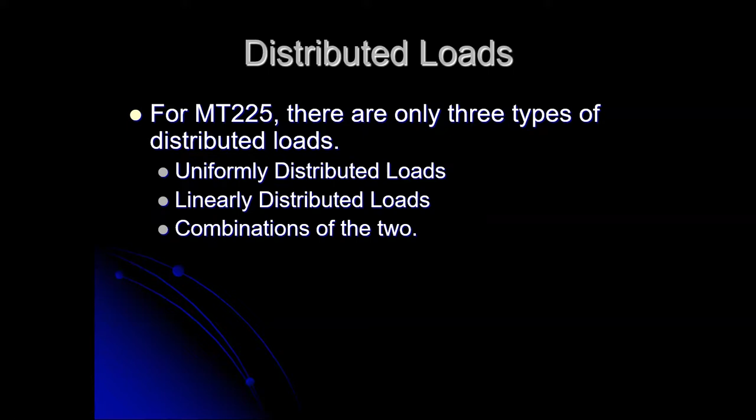Linearly distributed loads start off at almost nothing and then climb up to some peak value after some amount of distance. So it's a straight line behavior with weight or with force, and that's the way we draw them out, so that the representations of those forces call into mind things that are uniformly distributed or linearly distributed.

And we can combine the two. We can add them together. We can put them on top of each other, things like that. And we'll see a couple examples of that.

So to handle a distributed load, we have to find the load's equivalent concentrated force. And that involves two pieces of information. Just like in weight and balance, you're looking at the force of gravity distributed all over the aircraft. You not only need to know the total weight, that's how much force there is, but you need to know where that force is, the center of gravity location.

So essentially, in each of these distributed forces, we're going to find a center of that force. That's the location where the force is applied. And then we have to total up how much force there is. So there's always going to be two factors involved in finding out what the equivalent concentrated force is: a total amount of force and then a location where that force is.

If we replace the distributed force with the equivalent point force, nothing changes about the loading of the structure. Specifically, the reaction forces at the supports will not change. There is some material difference inside the structure, but as far as the supports are concerned, it can't tell the difference between a distributed load and a concentrated load. So we turn everything into concentrated loads because it makes the analysis easier.

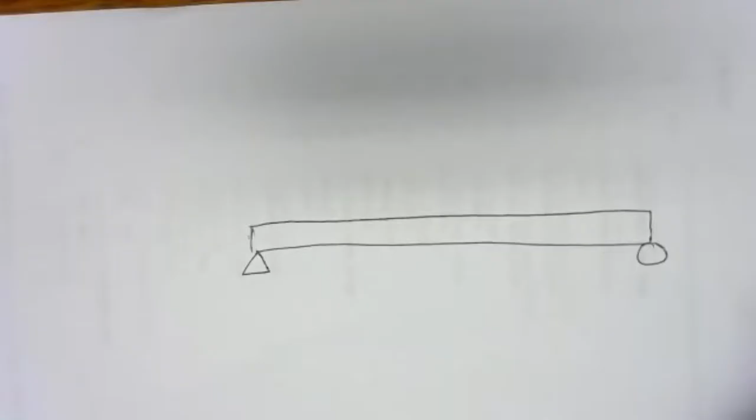And let's put a couple of distributed forces on here. We'll have one that looks something like that—let's say 2 kips per foot, and we'll let that extend over a distance of 4 feet. And we'll let that distributed load start, let's say, 2 feet in from the end of the beam.

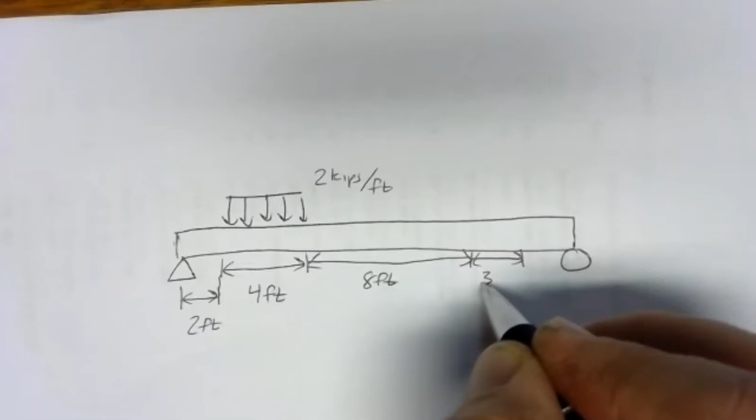And then let's see, maybe we'll put 8 feet in there, and then maybe another 3 feet. And we'll have a little bit heavier distributed load there of, let's say, 10 kips per foot, and we'll put that also 3 feet from the end of the beam. So that's all fully dimensioned out now—we know what the sizes are.

And I guess I'll draw another arrow in there. There we go. So there we have two distributed forces.

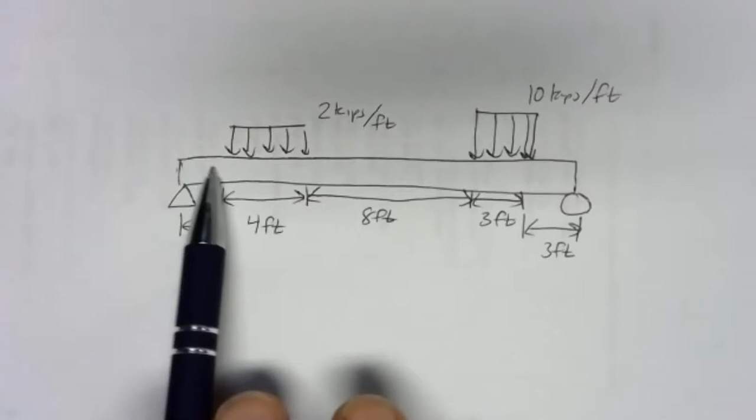Now, to analyze this problem, we actually have enough information to figure out the support forces, but we're not going to work that out here. Our only task right now is to turn this into an equivalent point force problem, because these supports can't tell what the load looks like. It doesn't know if it's dealing with a distributed force or a point force. The beam knows—the material that makes up the beam is going to be loaded differently if it's got a distributed force versus a point force. But as far as how those loads are handled by the supports, it's not going to make any difference.

So we have to turn these two into their equivalent point forces, and we have to figure out where those point forces are located. So we can start by drawing the beam over again.

First thing I like to do is figure out what is the magnitude of the force I'm dealing with, and just work with one distributed force at a time. So my first one here, I've got 2 kips per foot spread out over 4 feet. Essentially, I've got a rectangle here that is 2 kips per foot high, but 4 feet wide. If I wanted to find the area inside here, it's just the area of a rectangle—you take the height and the width and multiply them together. So this equivalent point force is going to be 8 kips.

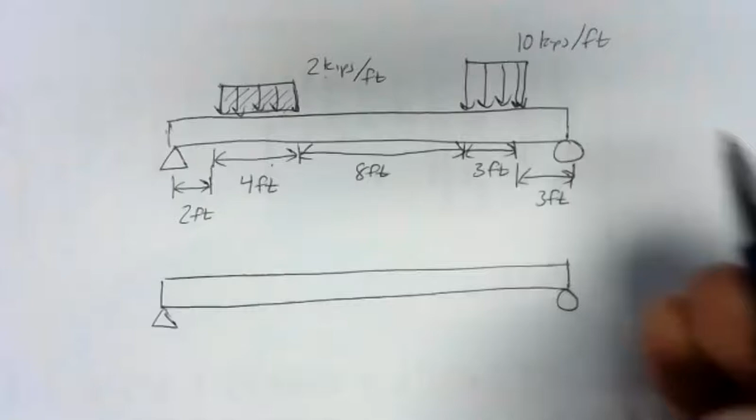Watch the units, be careful. I'll write it out once explicitly, but I'll expect you to get the units right in the future. If I take 2 kips per foot and multiply that by 4 feet, the feet cancel out, and I'm left with 2 times 4, 8 kips. So I've got an equivalent 8 kip force here.

And that 8 kip force is going to be dead in the middle of that 4-foot range. So to figure out where to put it on the end of my beam, if I'm referencing my pinned support here, I've got to go 2 feet in, and then half of 4 feet, which would be another 2 feet. So that equivalent point force of 8 kips is going to be 4 feet in from the end of the beam.

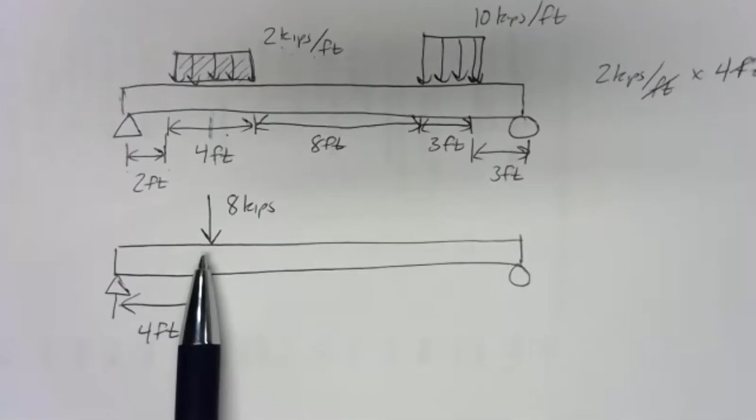So there we've successfully translated between a uniformly distributed force and its point equivalent force. We figured out the magnitude by multiplying the intensity, 2 kips per foot, by the length it's distributed over. Each foot feels 2 kips, we've got 4 feet to deal with, so we've got a total of 8 kips. The location is dead in the middle of the distribution—you look at where it starts and where it ends, dead in the middle, the balance point. Essentially, think weight and balance: where would you put your finger to balance this shape? The only place where it's going to have no moment, where it's in balance, is dead in the middle, where there's the same amount of force trying to rotate it clockwise as counterclockwise.

Let's try it with the 10 kip per foot force. Here we've got 10 kips per foot, spread out over 3 feet. So each foot feels 10 kips, and we've got 3 feet to deal with—that's going to be 30 kips.

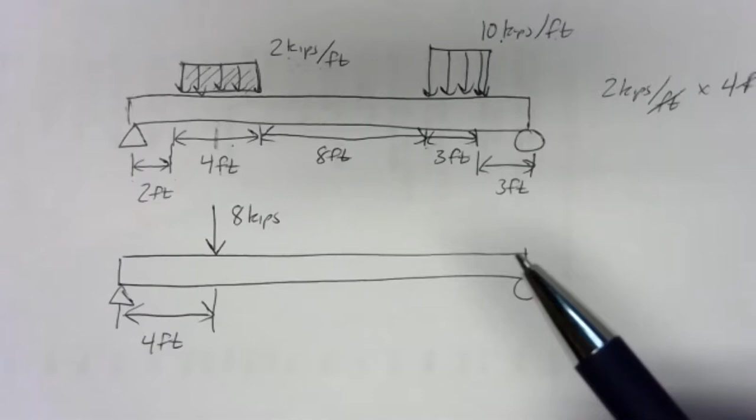So that's 30 kips of force. Where it's going to be located, it's going to be dead in the middle of that distribution, so right in the middle of this 3-foot range. So my equivalent 30 kip force is going to be right around there. I have to leave a little bit of schematic variation—remember, it's not quite to scale, but the labels should all work out. So we've got 30 kips of force there.

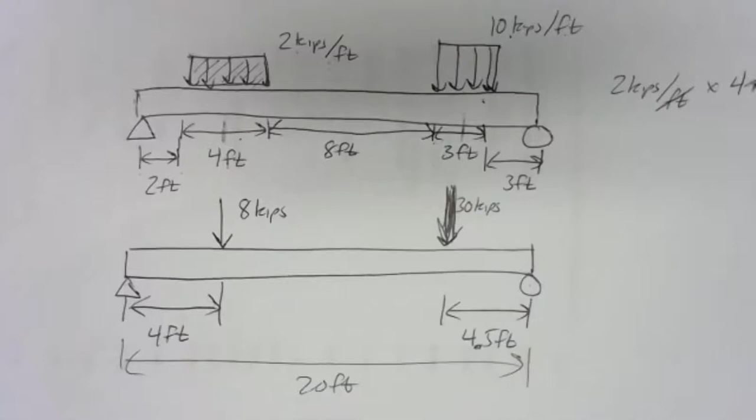If I go from the other end of the beam, I've got 3 feet plus 1.5 feet, so this would be 4.5 feet in from the other end of the beam. Then you could figure out what the distances would have to be in the middle, or knowing that the whole beam is 20 feet long, you could figure out the geometry you'd need from there. Remember, when you find moments, all the forces have to be measured from one point, so you'd have to do a little math here to figure out your distances. But as long as you've got them located, this would be the equivalent problem.

So this is just like the problems we solved last week, and just like what's on your current homework assignment. That's how we translate a uniformly distributed force into equivalent point forces. We take the new situation, turn it into the old situation, and then solve the old situation.

Anything not quite making sense there?

All right, well, let's see a linearly distributed force.

So that's our uniformly distributed force. The linearly distributed load looks something like this, where it starts out—depending on which way you look at it—you can either think of it as starting out heavy and then tapering off to nothing, or starting off really light and tapering up to some maximum.

W in this case, the intensity, refers to the maximum intensity—the height of this triangle. If it helps you to think of it this way, you can call it a triangularly distributed force. If you want to reference the shapes, triangle and rectangle, as long as it helps you get the equivalent loads, go for it.

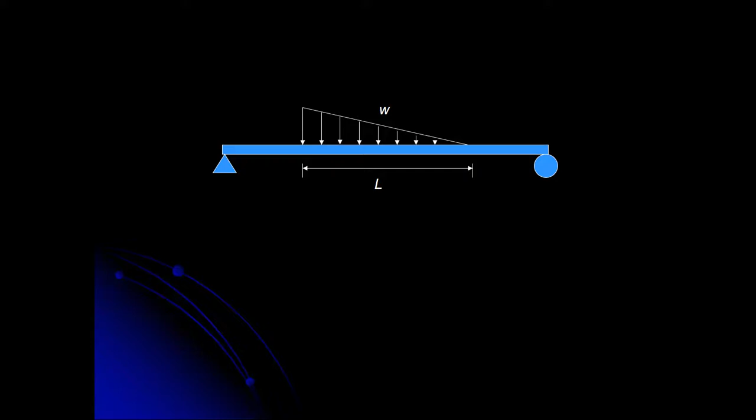The base in this case is the length. The height is the maximum intensity, W. So the magnitude of our distributed force, the equivalent point force size, is going to be 1/2 W times L. In fact, if you page back and forth between the two slides, you can see that it's really just half of the uniformly distributed load.

When we cut that in half, we get the linearly distributed load. The tricky point is figuring out where to put it. The middle is not going to work here. If this was some shape cut out of metal and you tried to balance it on your finger by putting your finger right in the middle, it's going to rotate.

If you think about it that way, your instinct would probably tell you, well, I can't support it at the middle and have it balance. I'm going to have to move my finger toward the heavier end, toward the end that's pushing down harder. The balance point of this distribution of load is going to be closer to the big end of the triangle. Exactly where? That's a little bit harder to calculate.

It requires a little bit of more advanced math to figure out exactly where it goes. So you'll have to trust me when I say that it is 1/3 of the length in from the large end of the triangle. There are a few geometric arguments you can make on that, but for the most part, for a linearly distributed load, the balance point—the point where that equivalent force needs to be applied—is 1/3 the length in from the big end of the triangle.

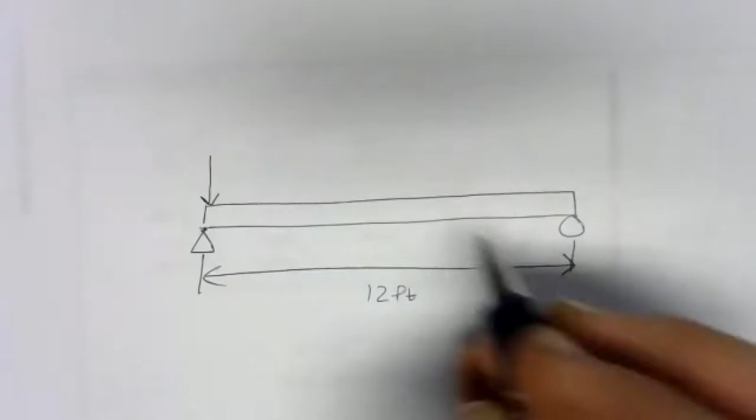And we'll put a linearly distributed force here from right at the beginning of the beam down to, let's do 3 feet. So that's spread out over 3 feet. And let's make this a 200 pounds per foot maximum distributed load. So that's how high this peak is. It tapers off to 0 over 3 feet.

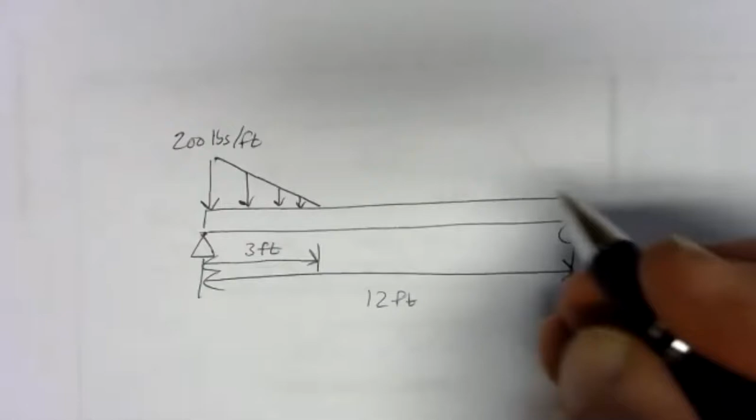And then we'll put another one in here. That spreads out over 6 feet. And we'll have that one start out at 400 pounds per foot and taper down to 0 over 6 feet, or start at 0 and taper up to 400 pounds over 6 feet.

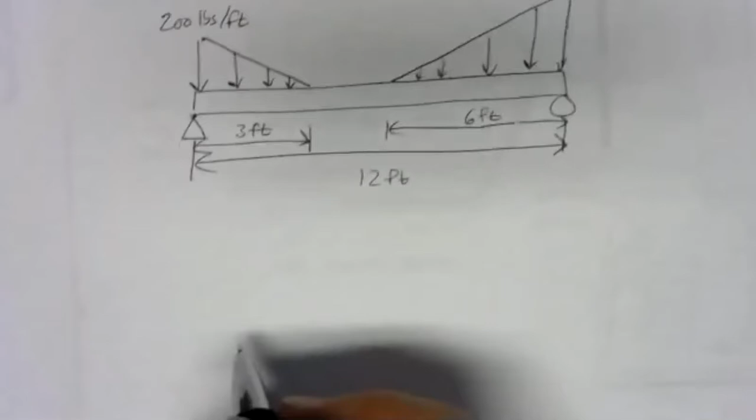So there's our setup. In order to analyze the problem, we have to figure out what are the equivalent point forces. So let's redraw the beam. Deal with the 200 pound per foot force first. So we have 200 pounds per foot spread out over 3 feet. We need the area underneath there. So it's a triangle with a height of 200 and a base of 3.

So we take 1/2 base times height. 3 times 200 would be 600. So 1/2 of that is 300. So this is 300 pounds. Another way to look at it is to say, well, if it was a uniformly distributed force, we'd have a rectangle here that would be 600 pounds. We can cut that in half. So it's 300 pounds. So we've got a total of 300 pounds from that first one.

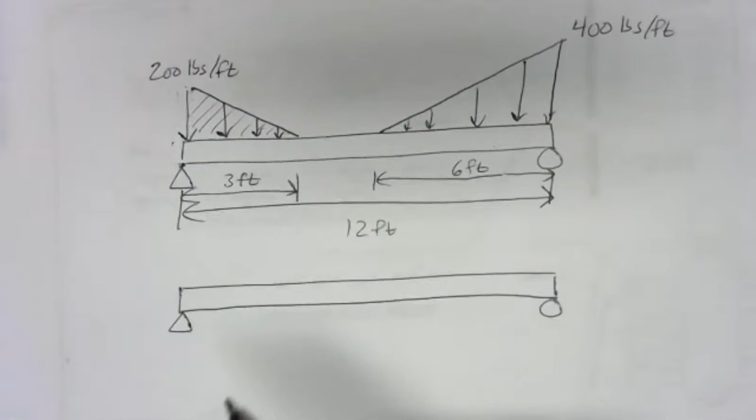Then the question is where to put it. If we tried to put it in the middle, it wouldn't work, because we'd have more moment on one side than the other. If we think about trying to balance here, there'd be more counterclockwise than there would be clockwise. We have to put it right at the balance point, at the CG, essentially.

And that's 1/3 of the length in from the big end. So we've got 3 feet. 1/3 of 3 feet is 1 foot. So we've got 300 pounds, 1 foot in from the end of the beam. So that would be our equivalent point force: 300 pounds.

One foot in from the big end. Think about where that physical balance point would be. If this was some triangular shape cut out and you tried to support it, it would have to be closer to the big end. So don't put it one third of the way in from the small end, it's one third from the big end. Let's try the other side here.

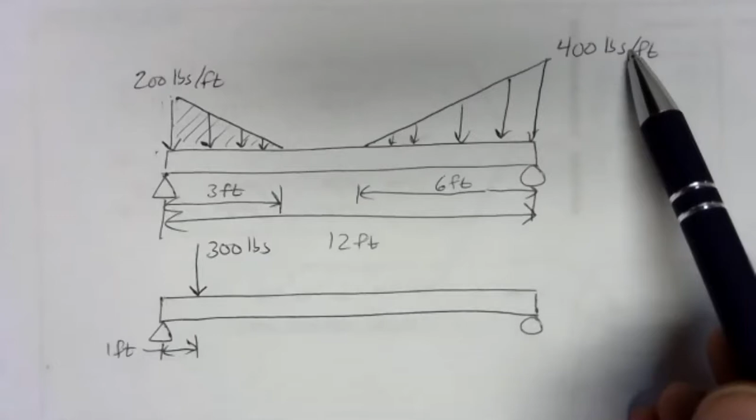Here we've got 400 pounds per foot spread out over 6 feet, but tapering down to 0. So again, it's a triangle. We need the area here, that's 1/2 the base times the height. So we have 6 times 400, that's 2,400. 1/2 of that would be 1,200. So we've got 1,200 pounds here.

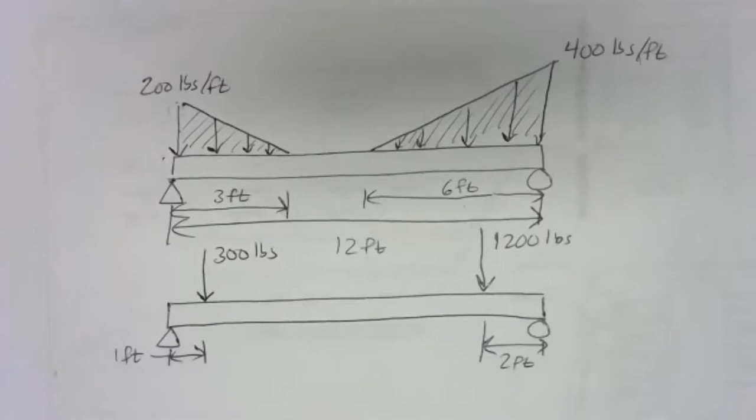1,200 pounds of force, 1/3 of the base in from the big end. Well, 1/3 of 6 feet is 2 feet. So that's going to be 2 feet in, 1,200 pounds. So our equivalent point force is going to be something like that, 1,200 pounds, two feet in from the big end. And then you could go and figure out the rest of the numbers. You could say there must be 9 feet there, and that should be enough to find the reactions at the supports.

So that's how we translate a uniformly distributed and a linearly distributed force into point equivalents. Once we have those point equivalents, it's the same old problem. Any questions there? All right.

Let's see what it looks like in the generic case. The generic case would need a lot more mathematical sophistication to handle. Some of you may have that, if you've taken a class in calculus, for example, you may have the tools to do this. In a generic distributed load, we could have essentially any shape, with some value there, maybe some value over here, and then does all sorts of strange things.

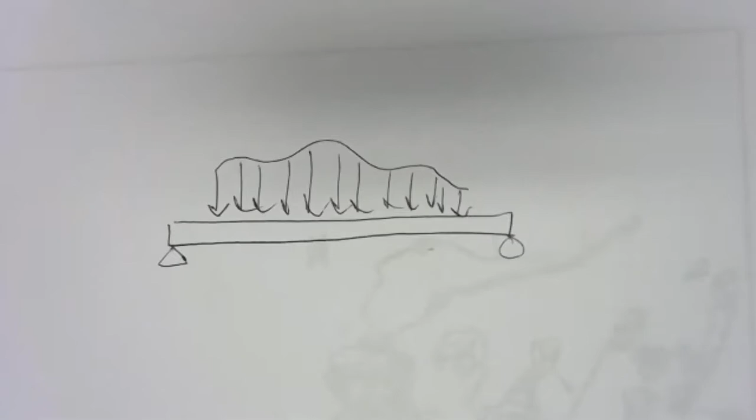So the intensity changes as a function of position. For those familiar with calculus, this is a classic setup for the problem we call integration. Finding the area underneath a curve is the classic application of integration. Fortunately, calculus is not a prerequisite for this class, so if you have no idea what I'm talking about, don't worry about it, we'll skip that. But if you have had calculus, this is something you could potentially do with it.

For our purposes, we don't have the mathematical tools to do that, so we'd have to have some way to find the area underneath the curve. That would just give us the magnitude of the force. Finding the position where the force belongs is a different calculation, what we call integrating the first moment of the distribution. That's where the term moment comes from, and why moment ends up tied up in weight and balance and things like that. There's a lot of mathematical stuff there that's pretty classic, but beyond the scope of our class.

For our purposes, we're going to deal with simple distributions, either the two we just described or some combination of them. The process is not unlike finding the center of gravity. Centers become an important idea, and that balance point has an official name, we call it the centroid of the shape. Kind of a funny name, but it's the generic name for center of gravity. It's just center of whatever, center of area, center of force, center of lift. They all fall under the category of centroid.

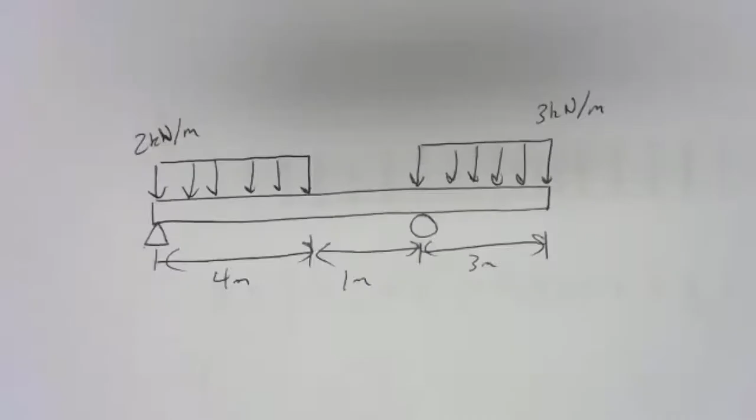All right, so there we've got the basic picture here. Not quite to scale, but we can work with it. So this has enough information to allow us to solve for the reactions. We know the geometry, we know the forces, so we've got everything we need. There are no missing pieces here.

The first thing we have to do is turn these distributed forces into equivalent point forces. The first force over here, what we'll do is jump one step here to my free body diagram, because we are going to analyze this one. I'll work this one through as an example and a refresher from last week about how to solve non-concurrent force problems.

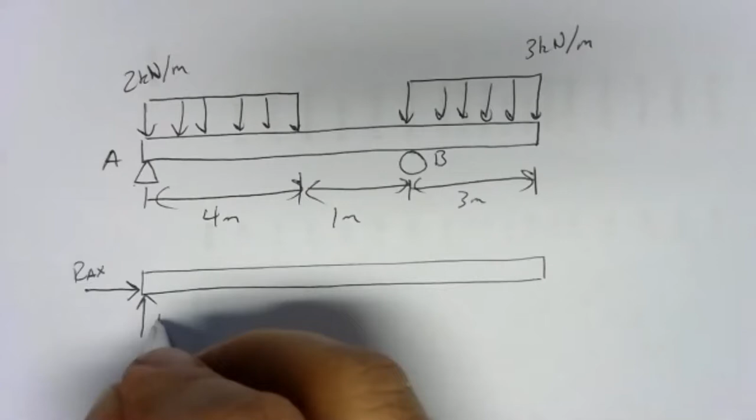So let's go ahead and put in our reactions at A and B as in our free body diagram. I really don't know what's going on at A here, so I'm going to assume RAX to the right and RAY up. And over here where B is, I'll assume our RBY is up. Got our coordinate system, positive X and Y, and our positive moment. But now we have to put our loads in.

We have 2 kilonewtons, and I think this is probably the first problem we've worked out in metric too. Shouldn't throw you too much, but all the principles work the same. We have 2 kilonewtons per meter spread out over 4 meters, so each meter feels 2 kilonewtons. We have 4 meters, so we have 8 kilonewtons total, not per meter. So 2 plus 2 plus 2 plus 2, 2 times 4, that's 8 kilonewtons.

And where it goes is dead in the middle. It's a uniformly distributed load, so it goes right in the middle. So we'll have an 8 kilonewton force 2 meters in. Sorry, I'm getting messed up by metric now too. So 2 meters in, half of that 4 meters.

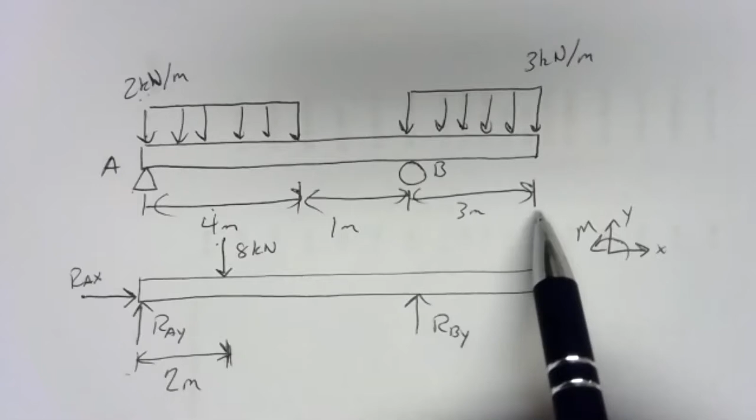Then we've got this 3 kilonewton per meter load distributed over 3 meters. So each meter feels 3 kilonewtons. We have 3 meters, so we have a total of 9 kilonewtons halfway. So we've got 9 kilonewtons, and that's going to be half of 3 meters, so that'll be 1.5 meters. So that distance there would be 1.5 meters.

Then we'd have to figure out all the rest here. We've got another, looks like 3 meters up to B, and then this would be the other 1.5 meters. Make sure it totals up. We had 4 plus 1 plus 3, that's 8. We have 5 plus 3, that's also 8. One of the common mistakes I see people make in doing these kinds of problems is getting the geometry wrong, doing the math a little bit wrong here, and ending up with different numbers. So check and make sure your beams are still the same length after you split things up.

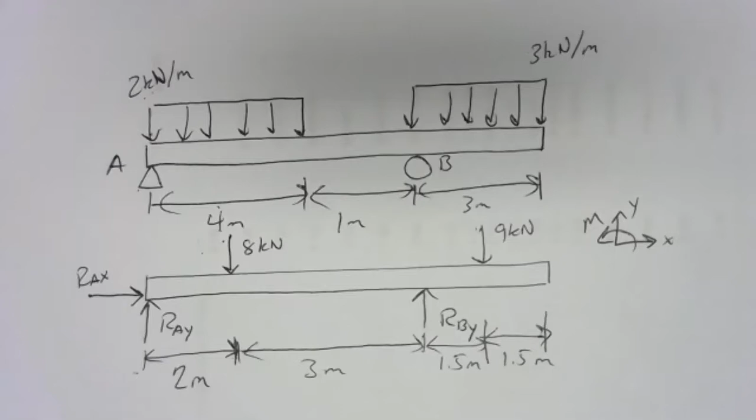So now that we've got the equivalent forces, the point forces, we can go through and solve this problem. So let's go ahead and do it. We've got our sum of forces in the x direction, and that's just RAX—we've got nothing else in the x direction. We have our sum of forces in the y direction. Well, there we've got a positive RAY, a negative 8, a positive RBY, and a negative 9. Those are all our y direction forces.

And then we'll have our sum of moments. In order to do the moments, we've got to pick a pivot point. I'm going to pick point A as my pivot point. That'll knock out RAX and RAY—they won't have a moment since they push on the pivot point, but everything else will. The 8 kilonewtons will have a moment, the 9 kilonewtons will have a moment, and RBY will have a moment. Remember that all the moments have to have 2 pieces of information—you got to have an arm and a force.

Let's work left to right here. We've got our 8 kilonewton force 2 meters away, so 2 times 8 is 16, that would be kilonewton meters. And then we have to take care of direction. Clockwise moments are negative, counterclockwise moments are positive. So if we pin the beam to the wall at A and we push down with 8 kilonewtons with nothing else pushing, everything's going to rotate clockwise. So this is negative 16 kilonewton meters.

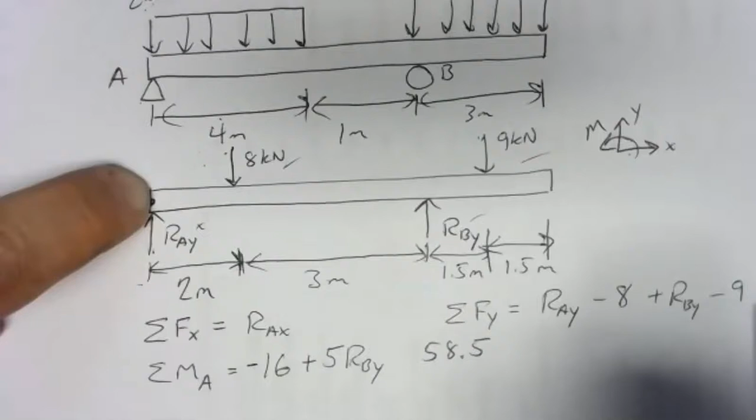And then finally, we've got our 9 kilonewton force. We have to figure out the distance to that—5 meters to B plus another 1.5 meters, so it's 6.5 meters. So we have 6.5 meters times 9 kilonewtons, that's going to be 58.5 kilonewton meters. Pinned at A, pushing down where the 9 kilonewtons is, that would be a clockwise rotation and negative.

So there we've got our sum of forces and our sum of moments. Since this is in equilibrium, we're assuming it's in equilibrium, all these sums must add up to 0. So that immediately tells us RAX is 0, which hopefully you could predict by looking at this because there are no side loads—there's nothing pushing to the side, so there's nothing for the part of that support at A that handles side loads to do.

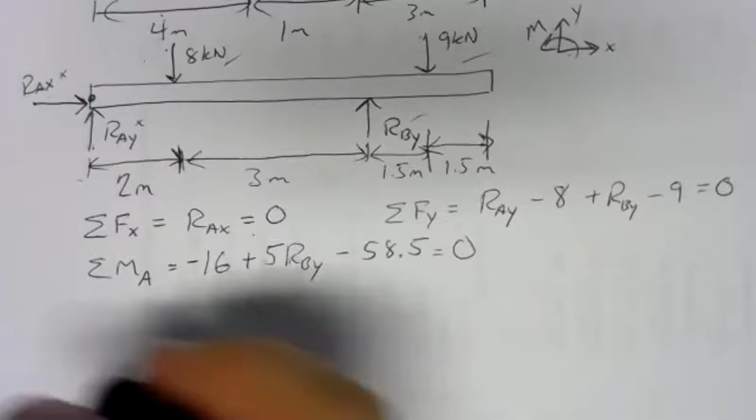So RAX is 0, we can go off to the side here and tabulate that. RAX is 0. We can't really solve our y direction equation just yet because we have too many unknowns—RAY and RBY are unknowns. So we've got to go down to our moment equation. That one we can solve.

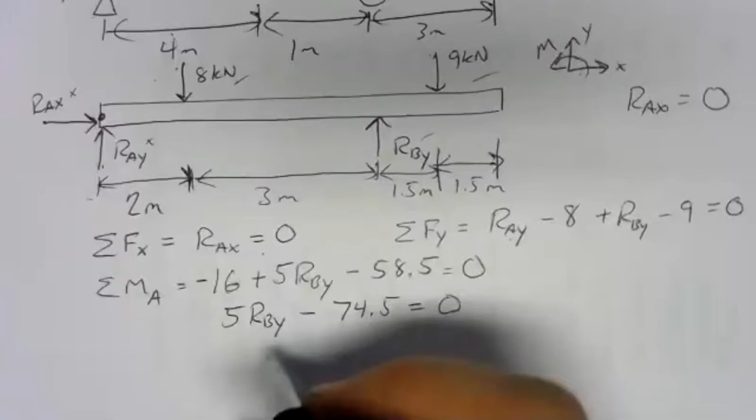If we clean it up a little bit, we've got 5 RBY minus, if we add together the negative 16 and the negative 58.5, we get negative 74.5, and that equals 0. If we add 74.5 to both sides and divide by 5—I'll assume your algebra skills are up to par and just jump to the solution—74.5 divided by 5 is 14.9. Don't forget the units, that's kilonewtons. That was one of the repeated themes on homework 3, people forgetting their units. So watch those units. RBY is 14.9 kilonewtons.

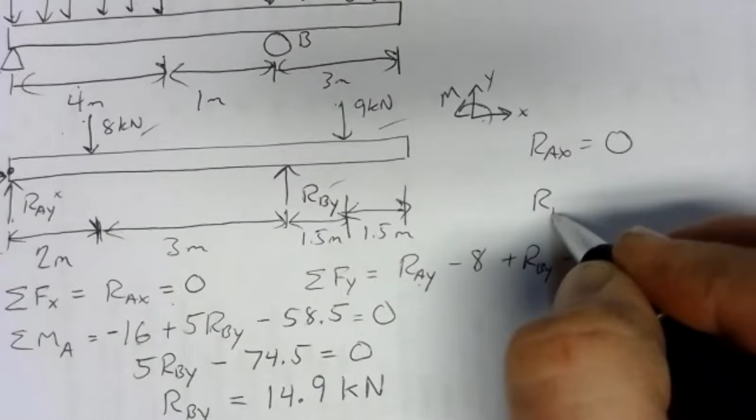It's important to note that this came out positive. That's confirmation that our arrow is drawn the right way for RBY. It confirms our assumption, which is a pretty safe assumption in this problem, but it confirms that we have the direction right. So we can go over here in our table and write RBY is 14.9 kilonewtons up.

Now that we know that, we can go to our y direction equation. We don't know RAY yet, but we do know RBY is 14.9 kilonewtons. If we clean this up a little bit, we have 14.9, minus 8, minus 9. If you solve that, it would be RAY minus 2.1 equals 0. So RAY equals 2.1 kilonewtons.

So again, it's confirmation that our arrow is drawn in the right direction—we got our assumption right. RAY is 2.1 kilonewtons up.

So there we've got our final answer. Now, if you look at the problem a little bit—if we didn't have this 9 kilonewton force at all, you can roughly estimate that this 8 kilonewtons is kind of in the middle, so we'd expect about 4 kilonewtons on both supports. We're getting much more load on the support at B than at A because of this cantilevered section.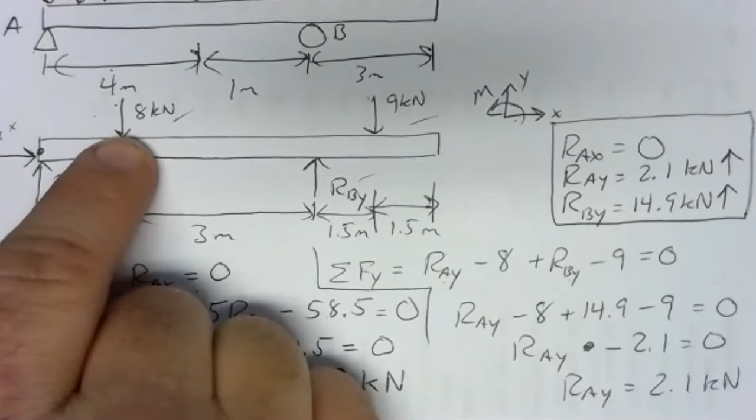In fact, if this 8 kilonewton force wasn't big enough—if this was 6 kilonewtons or 4 kilonewtons—we might end up with A having to hold the beam down rather than pushing up to support. And that can happen. So it's always important to go back to the structure and make sure your answers make some sort of physical sense to you, and that you can reason out what those answers mean.

Any questions on that example?

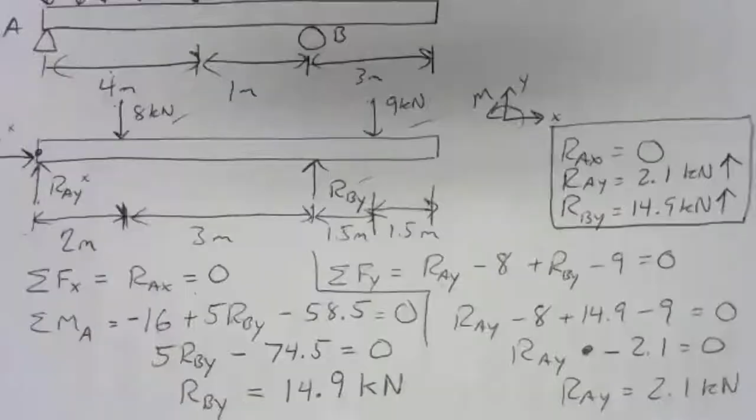Let's go back to the one we had here. We've already worked out most of it, so let's finish up this one as an example with the linearly distributed force. This was our example from a little while ago, and we figured out our locations and magnitudes of our distributed force. Now we can figure out what our free body diagram would look like and do the analysis.

So one more example of a simply supported beam problem. I'm going to leave the geometry on the top and we'll copy that in as we go. We have our 300 pounds there, we have our 1,200 pounds there. We have a pinned support at A, so we'll call that RAX and RAY. We've got our roller over here at B, which I want to draw a force there, call that RBY. Coordinate system.

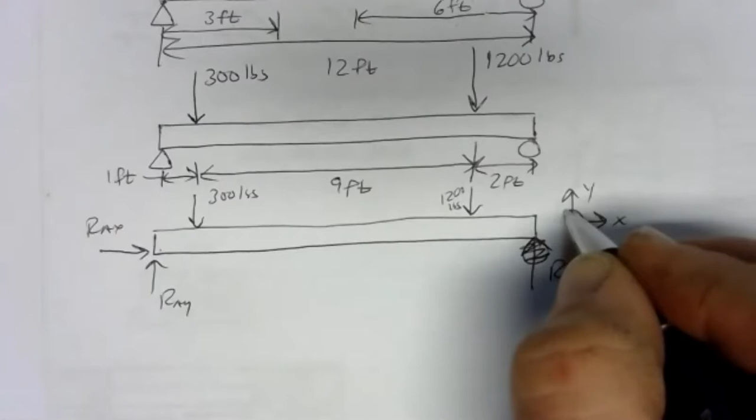Now, once again here, we have no side loads, so you might jump to the conclusion that RAX is 0. I would encourage you to go ahead and work it out, let the math tell you that RAX is 0. It's good confirmation, and it will keep you prepared for the situations when there is a side load, and there very frequently is.

So let's do our sums of forces. Sum of forces in the x direction, we've got RAX, but as we know, that equals 0 since there are no other side forces in the system and we're in equilibrium. So we've already got something we can put in our table: RAX is 0.

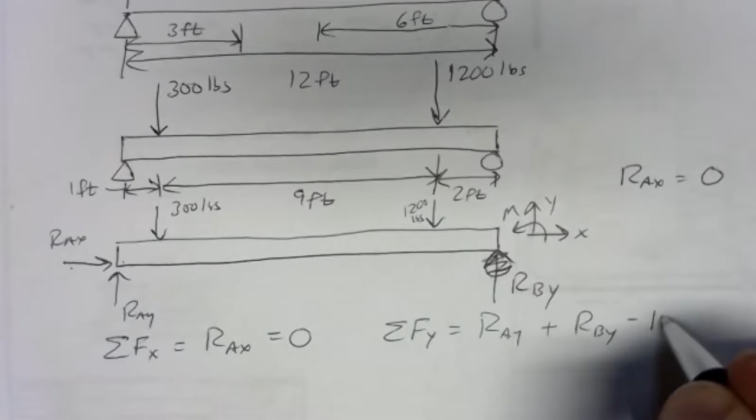If we take our sum of forces in the y direction, we've got a positive RAY and a positive RBY, those two right there. And then we've got what's pushing down: a negative 300 and a negative 1200. We can add those together, that'd be negative 1500. And we know that sum is going to equal 0. So that'll be our y direction equation.

If you think about it for a moment, what the y direction equation is really telling you—if I rewrite it just a little bit, adding that 1500 to both sides—we have RAY plus RBY equals 1500. Basically, all that's saying is the forces pushing up have to equal the forces pushing down. We have a total force pushing up of RAY plus RBY, and a total force pushing down of 1,500 pounds. If we're going to be in equilibrium, those two had better equal each other, because if one is bigger than the other, we don't have equilibrium—we have dynamics, we're going to have motion and acceleration. So the y direction equation pretty much always says that whatever's pushing up equals whatever's pushing down.

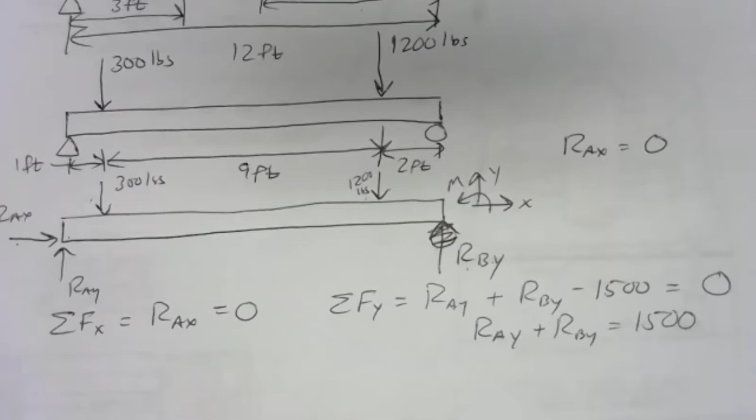And then we've got our moments, and again we'll pick our pivot point at A, sum of moments about point A. We're going to knock out RAX and RAY, but we'll have a moment from the 300-pound force, a moment from the 1,200-pound force, and a moment from RBY. So let's put that together.

I'm going to start with RBY this time. RBY is 12 feet away, so we have 12 RBY, counterclockwise, so it's positive. We have 1,200 pounds 10 feet away, so that's 12,000 foot-pounds clockwise, so it's negative. And then 1 foot away we've got 300 pounds, so that would be 300 foot-pounds, also negative since it would cause a clockwise moment.

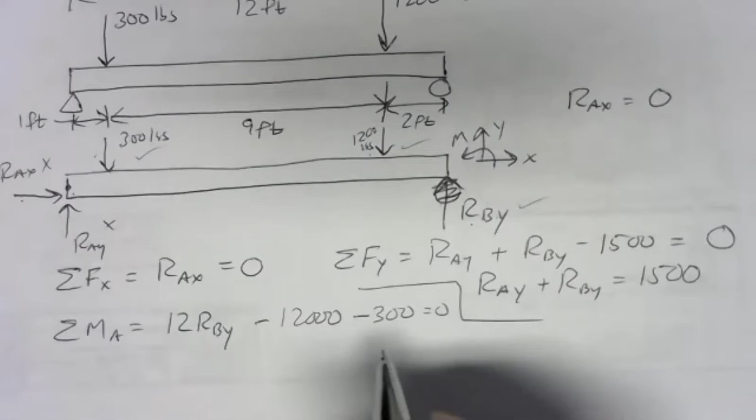So we can clean that up a little bit. We've got 12 RBY minus 12,300 equals 0. And if you go through and solve that, RBY—possibly not that nice of a number, but we'll deal with that—12,300 divided by 12, yeah, not too bad, 1,025. So we have 1,025 pounds pushing up at B. RBY is 1,025 pounds up.

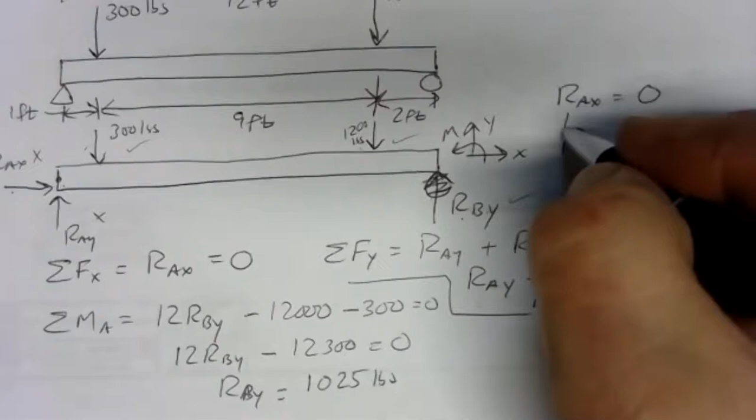Now we need RAY. Well, we know RBY is 1,025. RAY is whatever we have to add to that to get to 1,500. Well, that looks like 475. So RAY is 475 pounds up. And again, that looks pretty reasonable—go back to the structure, take a look at it, and make sure it looks reasonable, make sure the forces on the supports are consistent with the loading. Here we've got much more force pushing down on the right side of the beam, 4 times the force pushing down on the right side than on the left. So we should expect more load on our right side support, and that's exactly what we see.

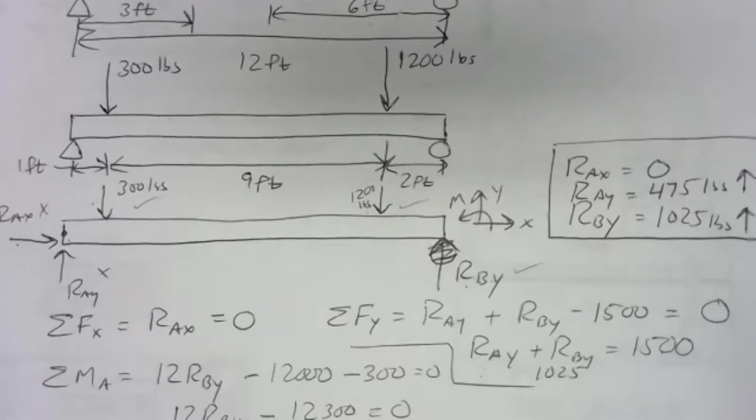1,025 pounds, so a lot of this 1,200 pounds is supported on B. A lot of this 300 pounds is supported on A, but some of it is being supported on the other end, so that's why we see lower loads there. But if you add them all up, that should be 1,500 pounds.

Any questions on that one?

Now one more example I want to put in here, and that is looking at a combined linear and uniformly distributed load. Let's see what that would look like first off, and then we'll figure out how we can analyze it. Let's start here with another simply supported beam. A combined uniform and linearly distributed load would look something like this, where we have something that starts out at a particular intensity.

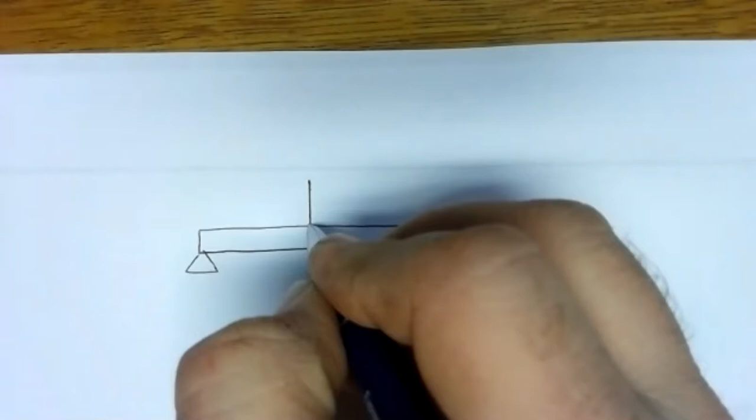Maybe let's say 2 kips per foot, and over some distance climbs up to some other value, maybe 10 kips per foot.

So that's not a uniformly distributed load. It's not a linearly distributed load either. Linearly distributed loads have to start out at 0 or end at 0. This doesn't start or end at 0. Uniformly distributed loads have to be uniform, and this isn't uniform.

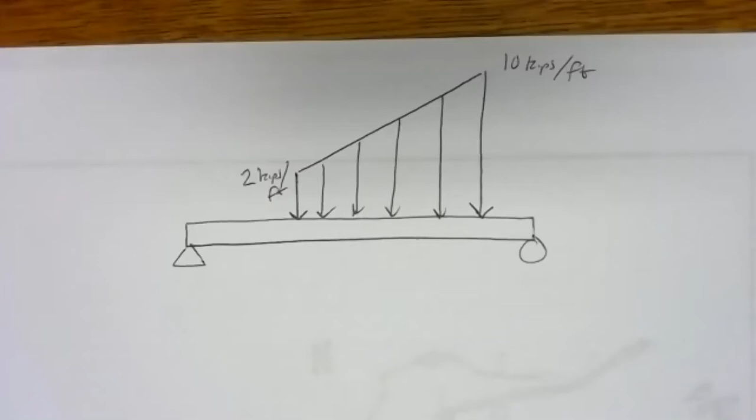Fortunately, if you're used to looking at shapes and breaking them up into simpler shapes, you might look at this and say, well, this kind of looks like a rectangle and a triangle. And that's exactly how you can break it up.

Let's put some geometry on this here. We'll make this 6 feet wide. But we're not going to solve this whole problem, we're just going to find the equivalent force.

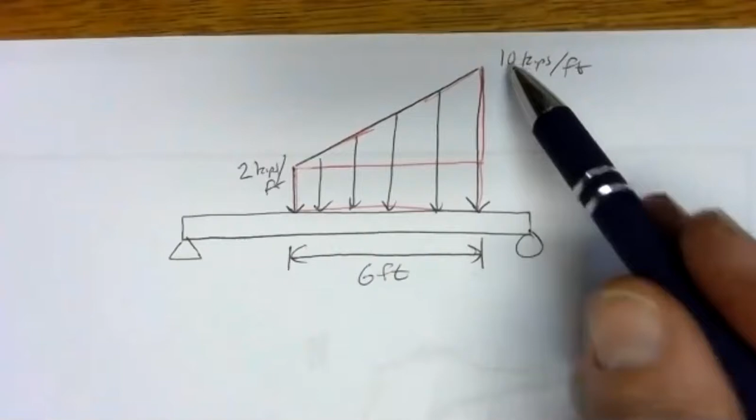Just like a geometry problem, treat the values here that are in kips per foot like they were distances. This is 10 units above the beam, this one's 2 units above the beam, so this top of the rectangle must also be 2 kips per foot there. What's left over here has got to be 8 kips per foot.

So what we've really got is a uniformly distributed force of 2 kips per foot spread out over 6 feet, and a linearly distributed force that starts off at 0 and climbs up to 8 kips per foot.

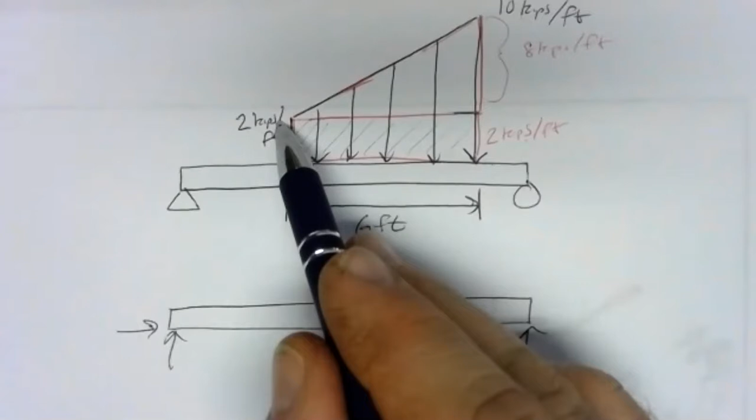So let's see how that would look in our free body diagram. We'd have our forces for our supports. The uniformly distributed force, its magnitude is the area inside this rectangle: 2 kips per foot high, 6 feet wide. So that's 12 kips. Where does that 12 kips go? It goes dead in the center. So dead in the center we've got 12 kips.

Then we've got this linearly distributed force. That's going to be the area of the triangle with a height of 8 and a base of 6. So 8 times 6 is 48, half of that is 24. So we have 24 kips, but where? A third of the distance in from the big end. A third of 6 feet is 2 feet, so from wherever this line is here, 2 feet in, that's where we'll have 24 kips.

So 2 feet in, we'd have 24 kips. And then in the middle, 3 feet, we'd have the 12 kips.

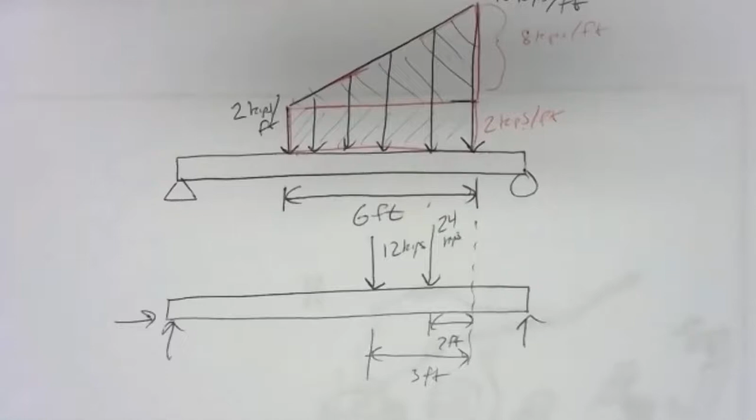So this combination of a uniformly distributed force and a linearly distributed force will show up in the free body diagram as 2 different forces, one from the uniform and one from the linear. Once you've nailed down their locations and got the geometry of the problem down, it's the same old problem: define your coordinate system, sum of forces in the x, y, sum of moments, set equal to 0, and solve.

Any questions there? All right, so let's see.

So those are our examples for distributed forces and the last new content prior to our exam.

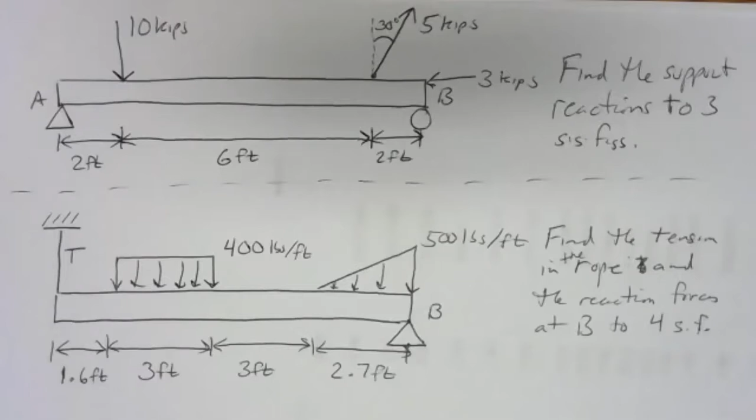Any questions on either of the problems? All right, I'll pause the video — let me know if there are any sticking points along the way.

We'll see how it works out when we work these out. So let's go ahead and start with the first problem, and we'll draw the free body diagram. So here we've got our beam.

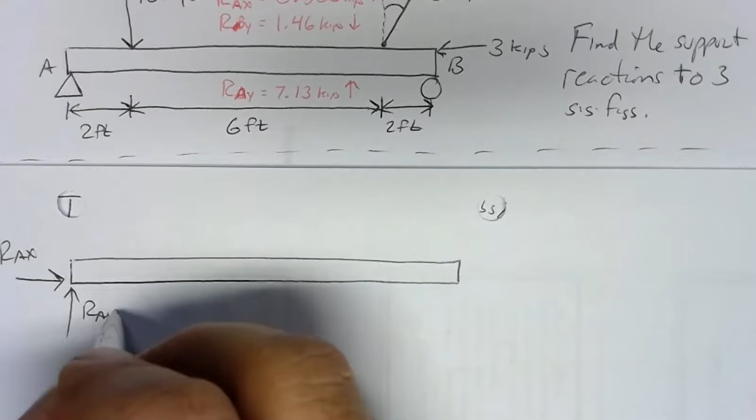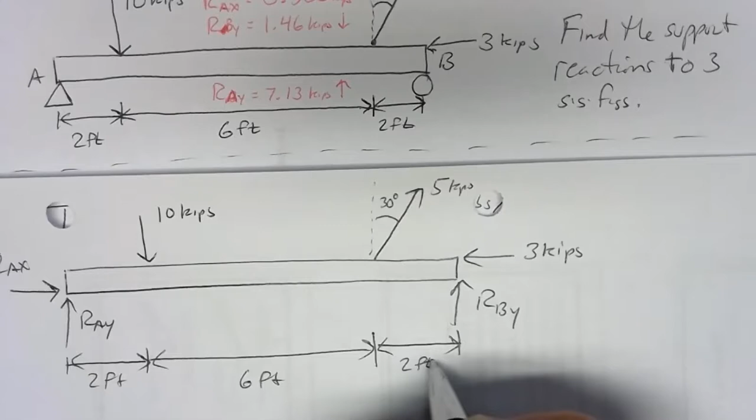We've got a pinned support at A, so we will replace that with RAX and RAY. We've got a roller at B, so we'll replace that with RBY. And then we've got our applied forces: three kips pushing to the left, five kips up and to the right shown as 30 degrees off of vertical, and then ten kips over here. Two feet, six feet, and another two feet.

So there's our free body diagram. Looks like we got everything: three applied forces, two supports, everything's in there. All right, so let's get a little more screen real estate here. There we go.

All right, so let's define our coordinate system. To the right and up are positive, and counterclockwise moments will be positive. So let's take our sum of forces in the x direction. We've got RAX to the right, so that's positive RAX.

We've got a piece of this five kip force. Be careful here, this is part of where I've encouraged you to use the angles you're given. I've seen people try to figure out what this horizontal angle is, that 60 degrees, and miswrite it as 70 degrees, since we have this natural tendency to round or go to 100. I think it has to do with finding change, trying to go, well, you've got 30 cents, how much to a dollar. But we're talking about angles, not dollars. So get used to just using the angle that's in place.

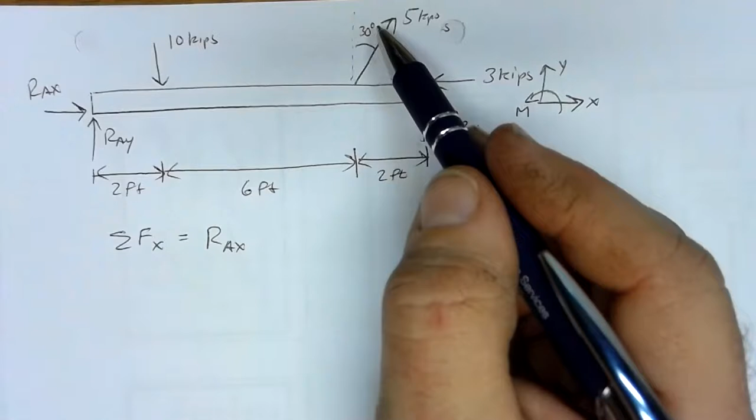It'll minimize your chance for errors. We're looking for the horizontal component. That would be the opposite side. Opposite goes with sine, so my opposite component here is going to be 5 sine 30, and that's going to go to the right, so it's positive. So plus 5 sine of 30 degrees. Then I've got this minus 3 kips.

So a lot going on in the x direction on this one. We'll do our sum of forces in the y direction. We've got a positive RAY. We've got a negative 10 kips. We've got the vertical piece of that 5 kips, and using that 30-degree angle, the vertical piece would be the adjacent side, and adjacent goes with cosine, and that's up, so it's positive. So we have 5 cosine of 30 degrees, and then we have a positive RBY.

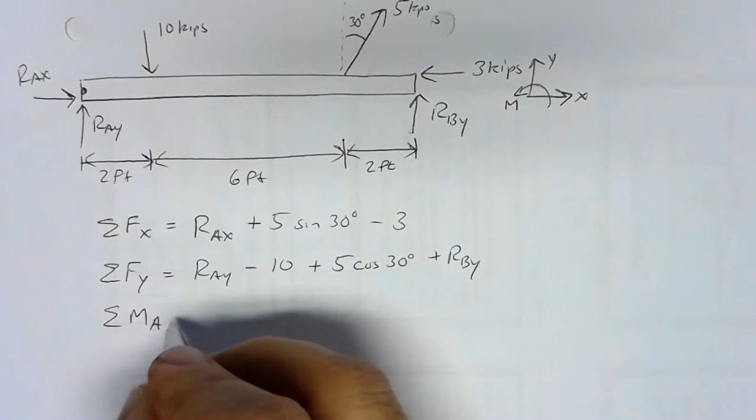And then we have our sum of moments about a point, and I'm going to pick point A. That'll knock out RAX and RAY, no moments from those two. It'll also knock out this 3 kip force, since we're assuming this beam is so thin that it doesn't matter if there's much arm here, it's not going to contribute very much moment. We can estimate it as being just going through the line of action through the pivot point.

So no moment from that one, but we will get a moment from RBY. We will get a moment from a piece of the 5 kip force, just that vertical piece. The horizontal pulls on the hinge, so it's not going to cause a moment. And then we've got that 10 kip force, so we should have 3 terms in our moment equation. The 10 kip force is 2 feet away, so 20 kip feet clockwise, so negative.

The 5 kip force, we need the adjacent side, we need that vertical piece. So that's going to be 5 cosine 30, but it is 8 feet away. So we have 8 times 5 cosine 30.

That's pulling up, so pinned here, pulling up there, it's going to cause a counterclockwise moment. So that's positive. And then we have RBY 10 feet away, so 10 RBY, also counterclockwise moment.

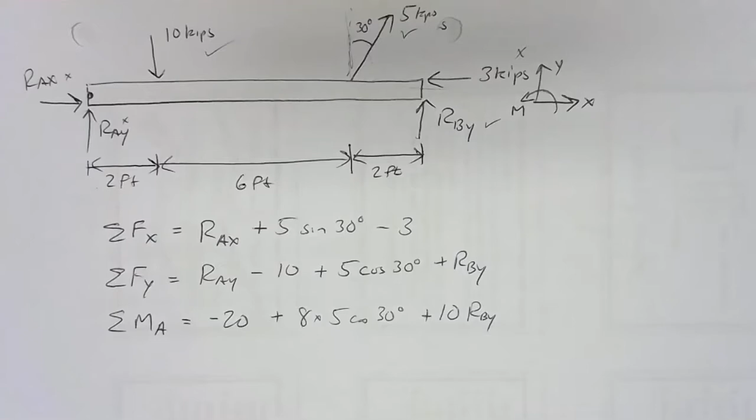So there we've got our sums, and since we're in equilibrium, those sums must equal 0. So let's go ahead and get these down to some numbers.

So for RAX, or for the x direction equation, we've got RAX plus 5 sine 30. Well, 5 sine 30, if you go to your calculator or you happen to know what the sine of 30 is, that's just 5 times 0.5, so that'd be 2.5, minus 3, that's equal to 0.

And if we solve that equation, and I'll leave you to do the details of the algebra, we will get that RAX is a positive 0.5 kips. So it's a positive half kip. That it's positive means my assumed direction up here is correct. I assumed it was pushing to the right, and it is.

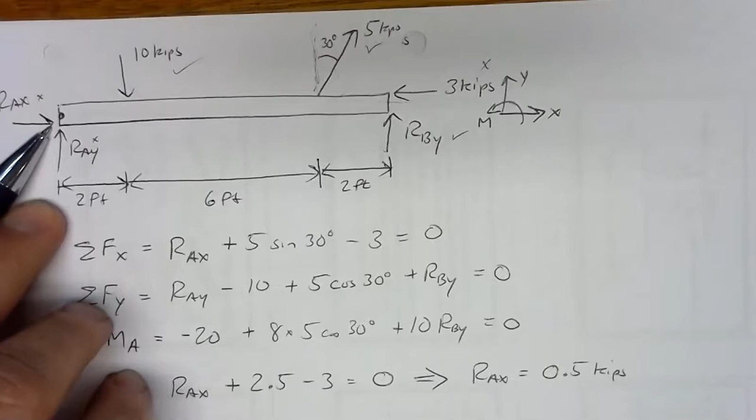Now you might have looked at it ahead of time and noticed, well, I've got some stuff pushing to the left, but I've also got some stuff to the right. I don't really know which one's going to win there unless you're doing trig in your head. So I had to take a guess, 50-50 shot. I guessed right, so half a kip.

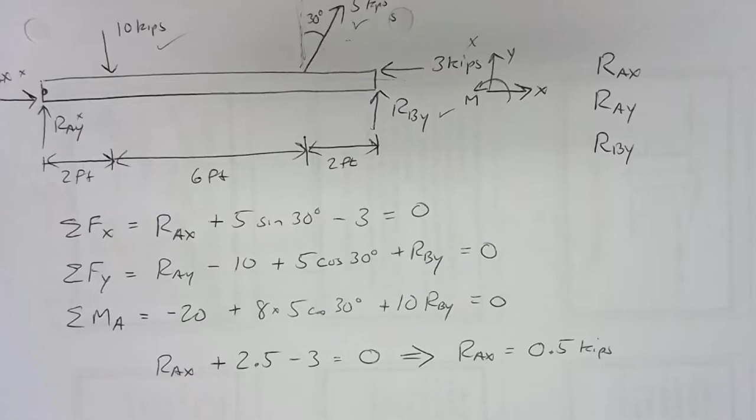So we've got part of our answer here, and we're going to fill in a table when we're done here for RAX, RAY, and for RBY. Now the specification for the problem was to round our answers to 3 significant figures. And although there was really no rounding going on here, we actually have 0.5 exact here. We'd still formally write it out to meet the specification of the problem to 3 sig figs. And to do that, we'd have to write 0.500 kips.

And I'm doing that there because we're not going to use RAX again. So let's go to the y direction equation. If we look at the y direction equation, we find we can't solve it because we're missing too many pieces. So we've got to go to our moment equation.

So let's run the numbers down on the moment equation. We've got minus 20. If we go over to the calculator, we have 8 times 5 times the cosine of 30. And since we want 3 good sig figs in the end, we'll round to 5 sig figs. So that comes out to be 8, 5, cosine 30 is 34.641 kips feet, rounded to 5 sig figs.

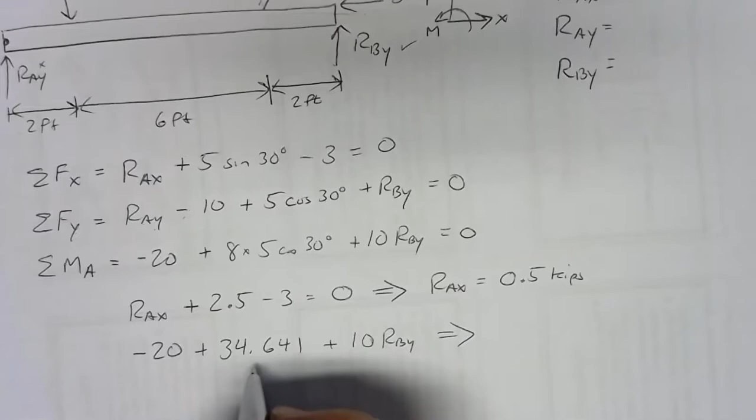And then we've got 10 RBY. And again, details of algebra we can leave to... well, we'll leave a little bit of a mystery here, but this is going to come out to be a positive 14.641 plus 10 RBY. So be careful here with your algebra. If you're just used to plugging things in the calculator and ignoring the signs, you could mess up here. This is equal to 0.

When we subtract 14.641 on both sides, we get 10 RBY, and that's equal to negative 14.641. When we divide both sides by 10, we'll get RBY is a negative 1.4641 kips. Now that one came out negative.

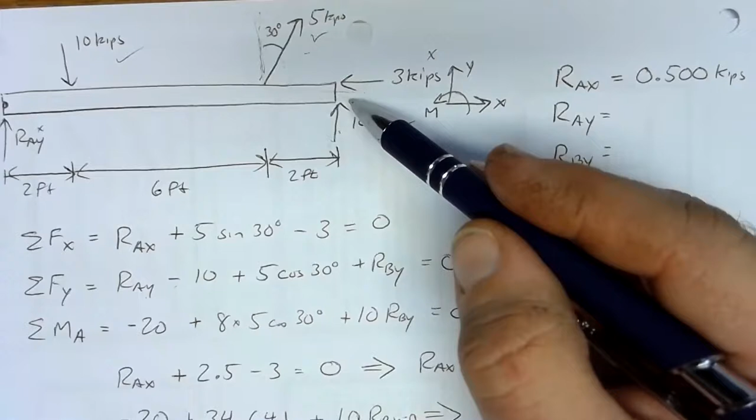And when an answer comes out negative, it means our assumption was incorrect. We assumed when we drew our free body diagram that the support at B was holding this end up. Well, this vertical component of this 5 kip force is enough to lift this end of the beam up. The 10 kips down here isn't enough to counteract it. So to keep this in equilibrium, the support at B is going to have to pull down.

Now, this would be a design issue. This would be something that we might be working out in design. This is a system that we need to support. Having the assumed direction be wrong here could tell us we can't use the support we wanted to. If we wanted to use a roller here, that roller, if it can only apply an upward force, is not going to be good for this job. So we'd have to find a different support that could apply a downward force to meet the requirements of our loads.

So we get a negative 1.4641 kips. Now we can feed that back into our y direction equation, where we have RAY minus 10 plus 5 cosine 30, which to 5 sig figs is 4.3301.

Now, because our answer came out negative, we have to plug it in negative. We replace the symbol RBY with exactly what it's equal to, positive or negative. Bring the sign along, don't lose that sign. So negative 1.4641.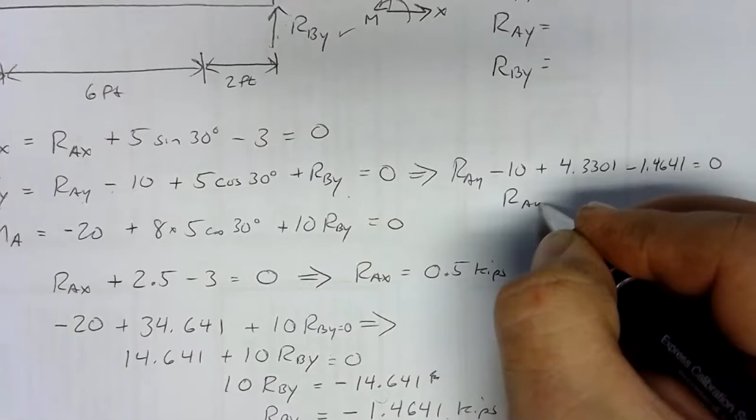And that will be equal to 0. If we run the numbers down on that, we've got a negative 10, we've got 4.3301 positive, and we've got 1.4641 negative. And there we get RAY minus 7.1340 equals 0. So RAY will be positive, RAY is a positive 7.1340 kips.

So now that we've got our answers, we can go ahead and round to our final number of sig figs. RAY is 7.13.

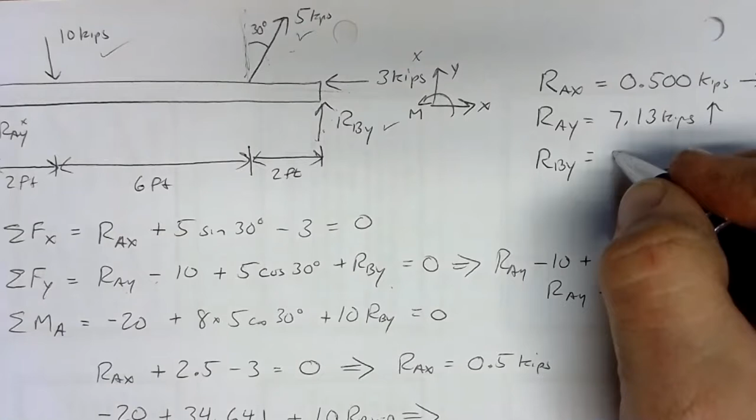And it's helpful to factor in or to write in the correct directions. We know RAX was to the right. RAY was up, and since it came out positive, our assumed direction is correct. Then RBY, we had the wrong direction, so we'd still state our answer positive here, 1.46 kips, but the direction is down, opposite what we assumed. So there we go, there are our final answers, rounded to the correct number of sig figs and specified with direction. That should match what we had for our answers there.

So that was the first problem. Let's go ahead and take a look at the second one.

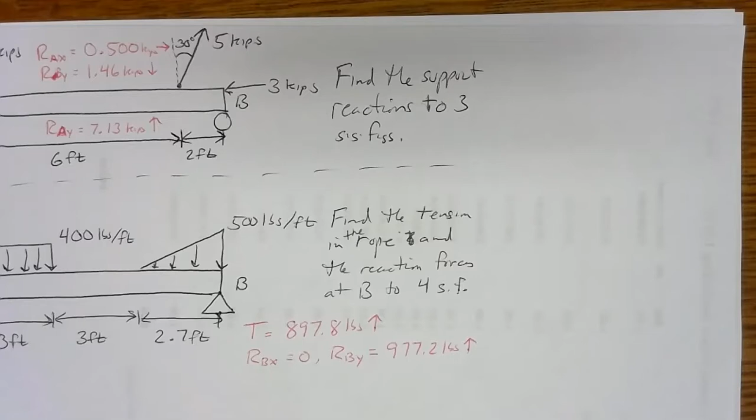On the second one, we have something a little bit different than what we've done in the past. I supported the left end of the beam with a rope, and the right end is pinned. Hopefully you can all look at that and agree that it's in equilibrium, as long as the rope can handle the load, and there aren't any side loads or anything in here. That rope should do just fine. This is in equilibrium, so let's go ahead and do the free body diagram.

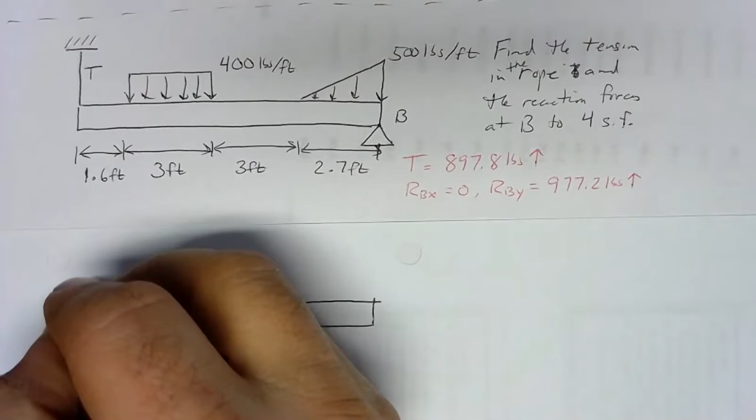We've also got this added wrinkle of these distributed forces. So the free body diagram will take care of the easy parts first, and then we'll deal with the distributed force. In our free body diagram, we've got this tension T. Ropes can only be in tension, so if it's drawn this way, it's got to be pulling up. So we've got our unknown tension force T there. Over here, we've got our pin support.

And just because the pin support's on the right end versus the left doesn't change it. It's still got two forces, and we'll call those RBX and RBY. And then we've got our applied loads.

Here we've got this 400 pound per foot distributed load over 3 feet. The point equivalent magnitude is going to be 400 times 3, so it's 1,200 pounds of force dead in the middle, so at 1.5 feet away from either end of the distributed force. So from the end of the beam, I've got 1.6 feet plus 1.5 feet, so 1.6 plus 1.5, we end up with 3.1 feet. So to get to our first applied load, we have to go 3.1 feet in, and that's where we'll find 1,200 pounds.

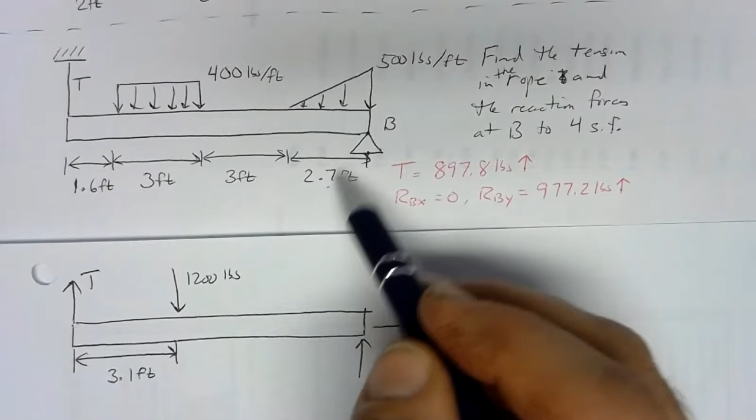Now on the other end of the beam, we've got a linearly distributed force, and that linearly distributed force peaks at 500 pounds per foot, spread out over 2.7 feet. So to find the equivalent force, we find the area of this triangle, so 1/2 base times height. So 1/2 times 2.7 times 500, and that gives me 675 pounds of force.

Now, where that is, it's 1/3 of the width in from the big end. Well, we've got 2.7 feet of width, divide that by 3, that's 0.9. So this distance here is 0.9 feet, so 9/10 of a foot.

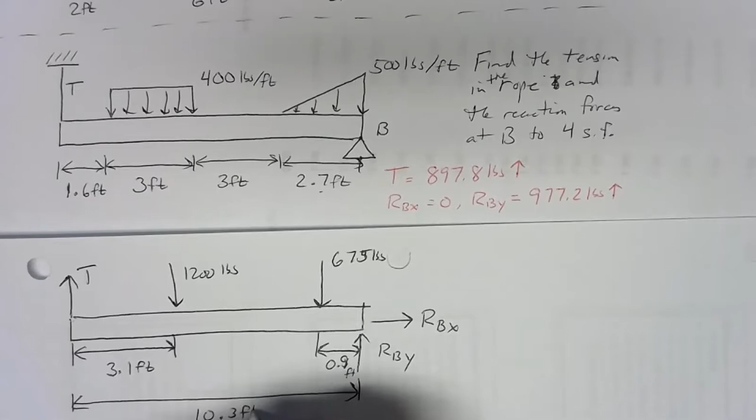Now the overall beam width, if we add that up from the original problem, we've got 1.6 plus 3 feet plus another 3 feet plus 2.7 feet. So the whole thing is 10.3 feet wide. So to get from the rope end of the beam to the other force, we just take that 10.3 and subtract off 0.9, so we get 9.4 feet there.

We'll need that number for our moment equation. So there's our free body diagram with our distributed forces translated into equivalent point forces. Let's define our coordinate system: to the right is positive, up is positive, and counterclockwise moments are positive.

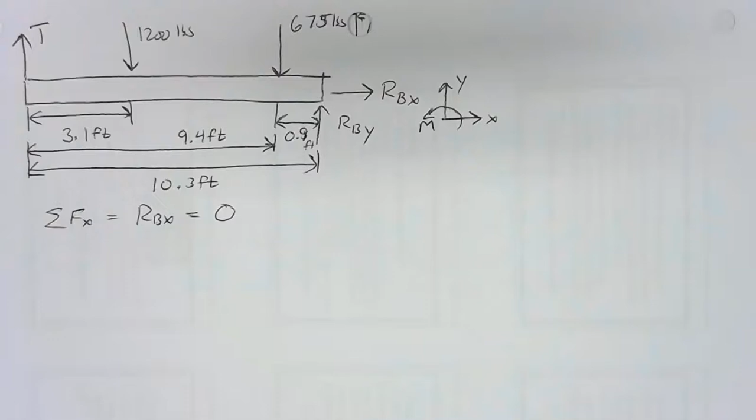Well, let's see, so let's do our sum of forces. Sum of forces in the x direction: if we look through this free body diagram, we've only got one force in the x direction, and that's RBX, so we immediately know RBX is 0. There is no reaction in the horizontal direction. So in our table of answers here, we're going to be looking for tension, we're going to be looking for RBX and RBY. RBX is 0, and when something's 0, it doesn't matter what units it's in, it doesn't matter what direction it's got, it doesn't have a direction defined, it's 0, it's nothing.

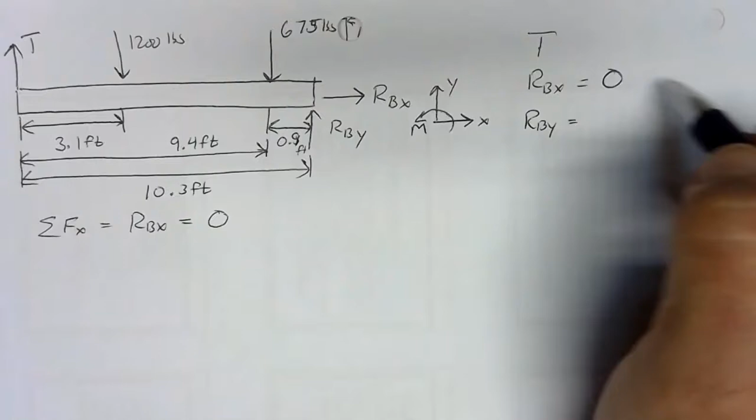And I wouldn't worry about writing this out to 4 sig figs as specified. Don't write it as 0.0000 - that's overkill and not useful because we can't count significant digits that way. Remember, we start counting at our first non-zero digit. If all you've got are zeros, you can't really define how many sig figs you've got.

Let's take our sum of forces in the y direction. Here we've got a positive T. We've got minus 1,200 pounds. We've got minus 675, and we've got plus RBY. So that's our y direction equation.

And then we have our moments, and I like picking the left side of the beam. You could have just as easily picked the right side and figured out your moments that way. It does not matter what point you pick. I just picked the left side out of habit.

So I need my moments about that point, which I'll label as A. That'll knock out T - I'll get no moment from T. RBX we already know is 0, but even if it wasn't, we wouldn't get any moment from it. Everything else we're going to get a moment from. We're going to have a moment from RBY, a moment from the 675 pounds of force, and a moment from the 1,200 pounds of force.

And that's why I needed this number, this 9.4 feet, because I need the arms from my pivot point. If you picked the other end of the beam, then you would need to know the distance to the 1,200 pound force from that end of the beam.

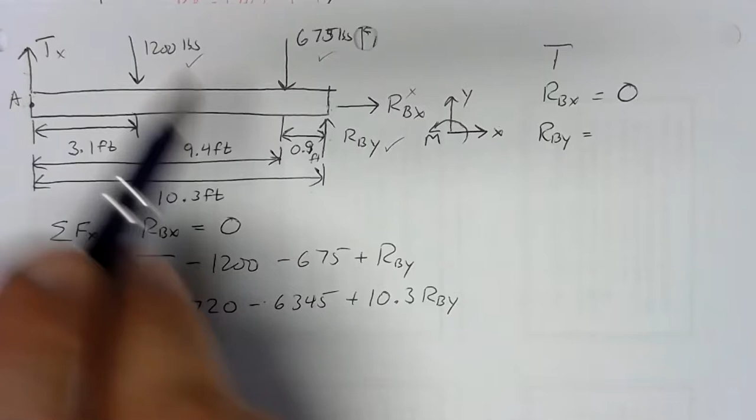And then we've got RBY 10.3 feet out, so 10.3 feet times RBY, and that would be positive. If we're pinned at A, we push up at B, that'd be a counterclockwise moment. Counterclockwise moments are positive. We're in equilibrium, so we can set our sums equal to 0.

And now we've got our equations of equilibrium to solve. We'll go to the moment equation first, since that one usually works out to be the one you can solve immediately. So to simplify it a little bit, we've got 10.3 RBY minus 3,720 minus 6,345.

So we get minus 10,095 equals 0. And if we solve that, RBY will come out to be... oops, did I mess up something here? Let's see, 3,720, 6,345. I get 10,065.

So if we divide that by 10.3, we get a big long number. Now we need 4 sig figs in our final answer according to the specification for this problem, so we'll keep 6 in our intermediate values. So RBY, I'm going to round this off so I don't have to write all these digits, but I'm going to round it to 6 sig figs. And to 6 sig figs, it's 977.184, and that would be pounds in this case.

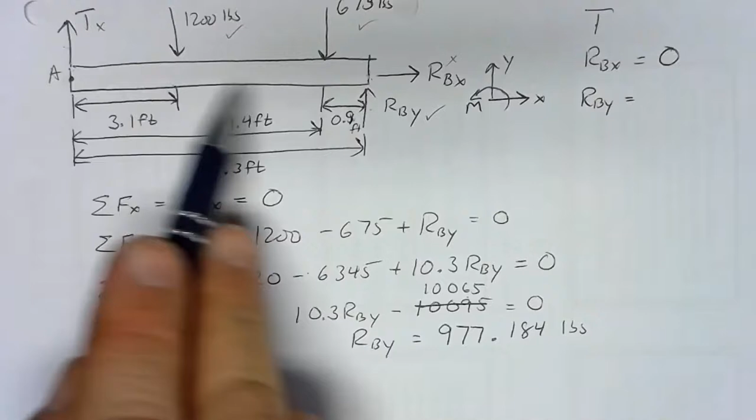Came out positive, so we know our direction's good for RBY, which was a pretty good assumption since we only have forces pushing down. It's pretty easy to figure out what directions the other forces have to be going in. But now that we know that, we can go up and substitute 977.184 in and solve for our tension. So we've got a negative 1,200, a negative 675, and 977.184.

And correctly solving this equation should give you a positive answer. Again, rounded to 6 sig figs, 897.816, and that would also be pounds. So that came out positive, so we know our assumed direction's good, and we'd be in trouble if our assumed direction wasn't good here because we're dealing with a rope.

And if that rope was pushing down, we'd have a strange situation. Ropes don't generally exert those kinds of forces.

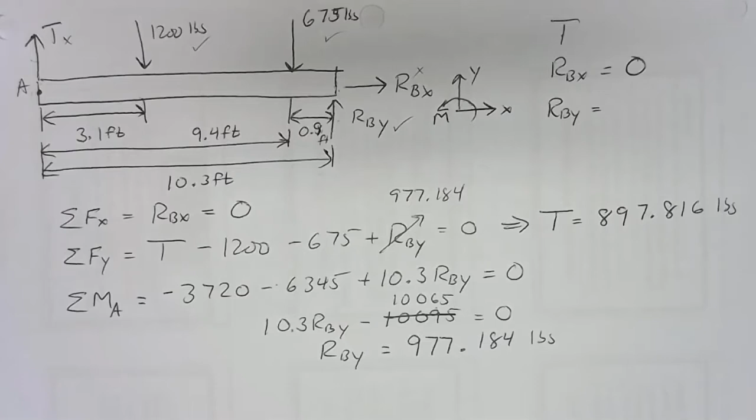Well, we got our final answers, so we can round those off to our final number of sig figs. Our tension is going to be 897.8 pounds, and that's up. RBY is 977.2 pounds, up. So we've got our final answers there.

Looking at the problem, we've got a roughly even split between the reactions on the left and the right sides, although this 1,200-pound force is closer to the tension, or closer to the rope. The 675 is much closer to the pin support. So those two effects kind of cancel each other out, and you end up with a roughly even split in load on either end of the beam. That should match our answers here, 897.8 and 977.2. So we got it right the first time.